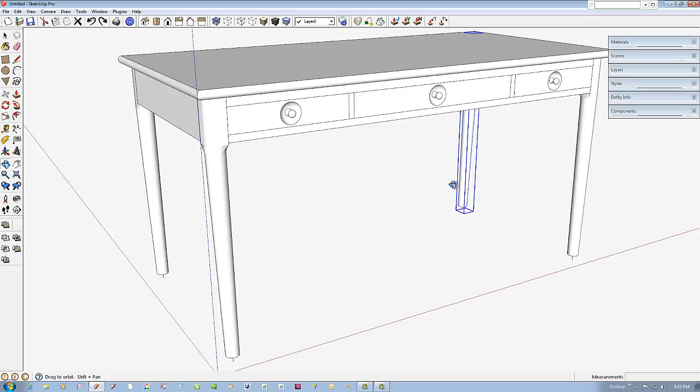Recently, a reader on the Knots forum asked how to create and edit tenon pins. This video will show how I do this on a modern Danish style desk I'm building now.

Here is the desk without tenon pins. I'll hide the top so you can see the basic construction with rails, drawer runners, and kickers. I'll pull out the drawer end assembly.

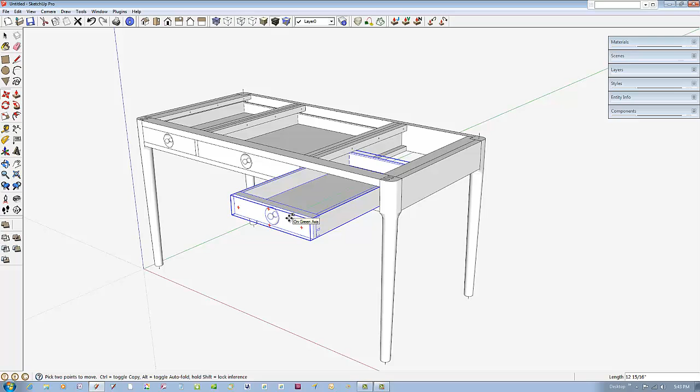The joinery at the front legs is shown here. You can see the front and side rails with their associated tenons.

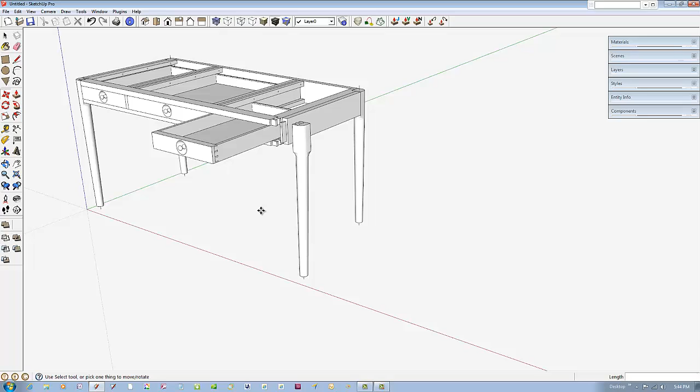To add the tenon pins, I'll pull a copy of the front leg over here to the right of the desk assembly. Now to zoom into the joint area of the upper leg.

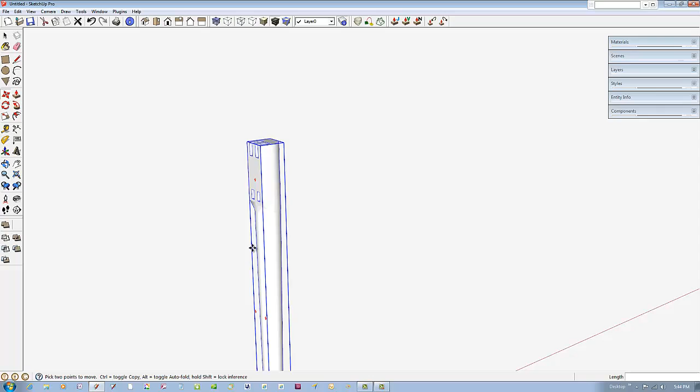And I can temporarily turn on X-ray so you can see the internal mortises.

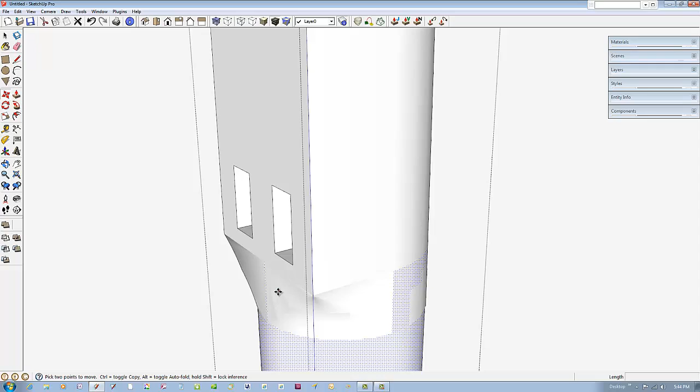I'll zoom further into this lower mortise area and lay out guidelines to locate the position of the tenon pin. Use the tape measure to find the center of the mortise, then create a guide point 3/8 inch off the edge.

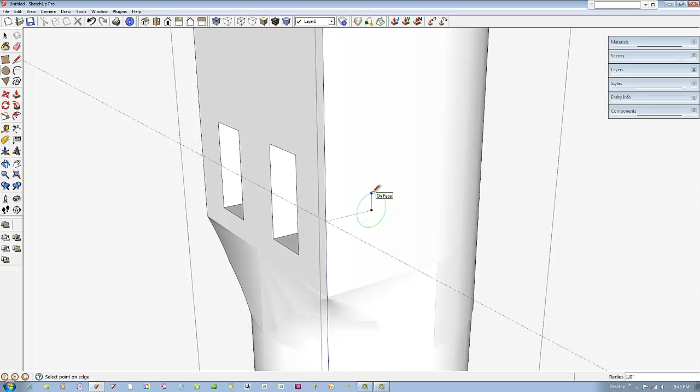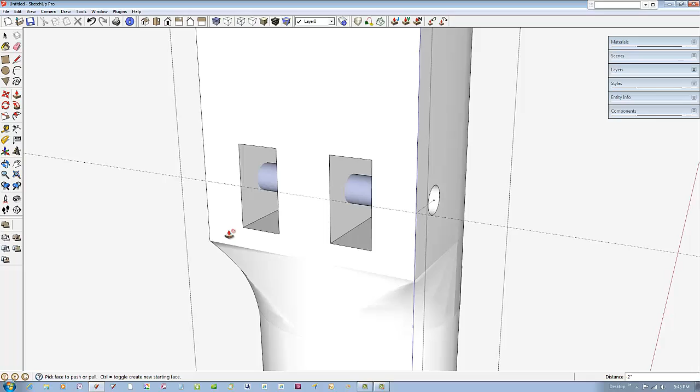Use the circle tool to create a 1/4 inch diameter circle, then with the push-pull tool, create a hole for the tenon peg. You can see the other end of the hole on the back side of the leg.

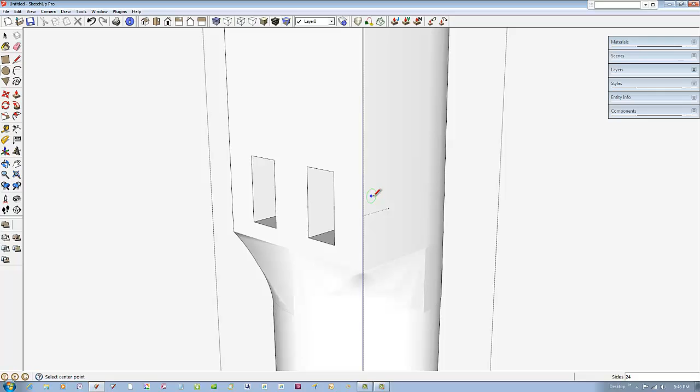Let's assume I'm not happy with the size of the tenon peg hole and want to reduce it to 3/16 inch diameter. Choose the eraser tool and delete the front circle, then orbit around to delete the circle at the other end. This removes all of the previous tenon peg. Note that the leg faces automatically heal themselves.

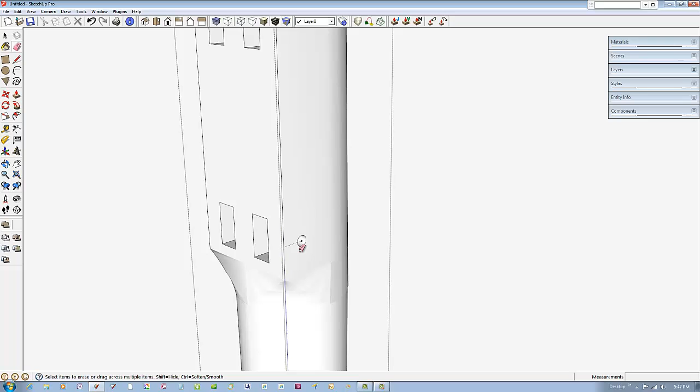Then pick the circle tool and place a circle at the new radius, 3/32 inch, and again use the push-pull tool to finish the hole all the way to the other end of the leg.

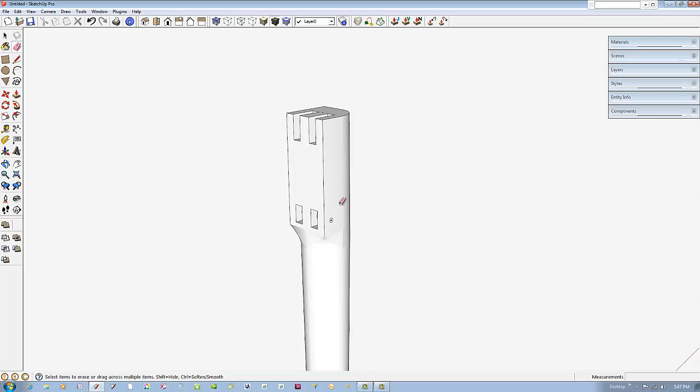That looks better, so I'll delete the guideline. But I like to have the center of the holes shown on my full-size templates. So I right-click on the circle and pick Point at Center in the menu. This places a guideline or a guide point at the center and will show up in my drawings for positioning the drill.